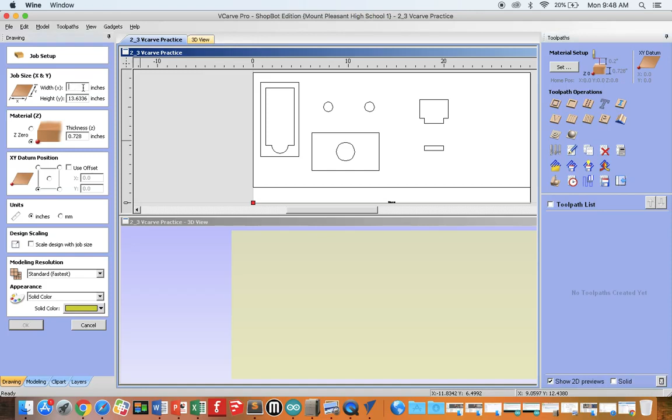Now we need to set up our job size. Your job size for X and Y will be determined by the wood you plan to take to the shopbot. For today's practice, let's assume we measured our material to be 30 inches on the X and 15 on the Y. Make sure that you deleted the old numbers and entered the new ones. For thickness, we would measure the piece of wood with a caliper, and let's assume we measured 0.75. So our material is now set up, X, Y, and Z.

The other job setup features you have to be aware of are Z0, which should always be in this position, and XY datum, which should always be in this position. Your units are inches, and you can click OK.

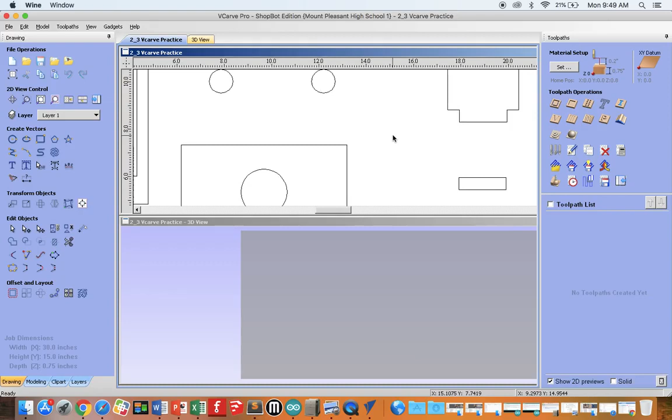Now I'm going to show you some ways to navigate your document. The first thing is knowing how to zoom. With two fingers, slide down to zoom out, and slide up to zoom in. If you ever get lost in your document, click this button, zoom to fit, and it'll relocate your view.

If you ever need to change your job dimensions, click this button and you can go back to this setup. Again, two fingers slide, I'm not clicking, just lightly sliding on the trackpad. Down will zoom out, up will zoom in. If you ever get lost, click zoom to fit and you'll find your document.

Next I want to show you how to join your vectors. When you bring a file in from Onshape, notice I can click on a line, yet this whole rectangle is not selected. If I try to move that rectangle, only that one line moves. That's not what we want. We have to join these vectors.

To do this, draw a box around your entire document. Everything should light up pink. Come down here under Edit Objects and you'll see Join Open Vectors.

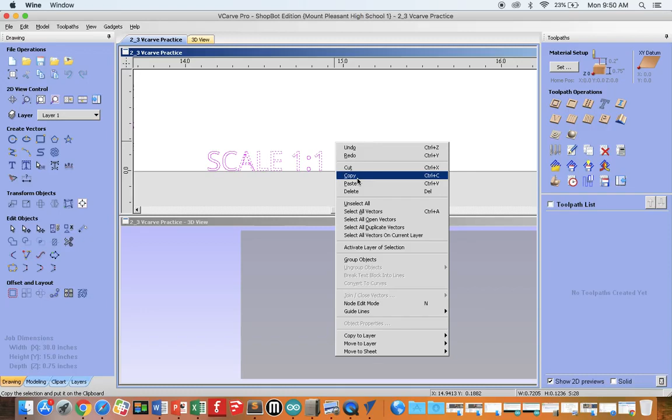I forgot to delete something before doing that. So I'm zooming in on this text. I drew a box around it. Two-finger click, delete. Now we can go in and join our vectors.

I mentioned zooming earlier. You can also do what's called pan. To do that, hold Control down on your keyboard, and with two fingers click and move your fingers around the trackpad while you're clicking. That will allow you to pan.

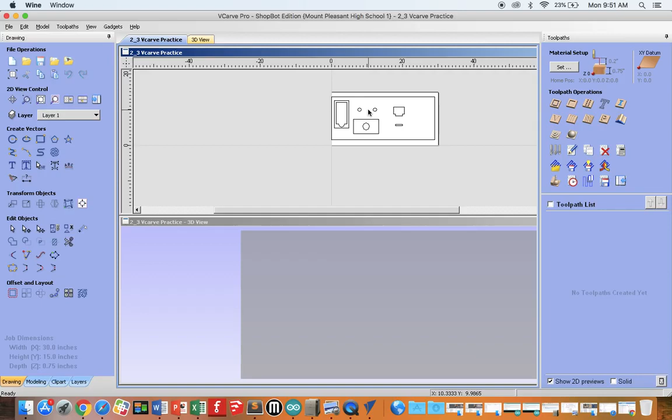Let's try to join our vectors again. Now I'm going to drag a box around all my vectors. Remember, I messed up last time, I had to get rid of that text. Now I can go to Join Vectors,

and you see closed vectors. I only have 3, those would be the circles. They're all considered closed vectors. But I have 30 open vectors. These are all these individual lines here. These are considered open vectors.

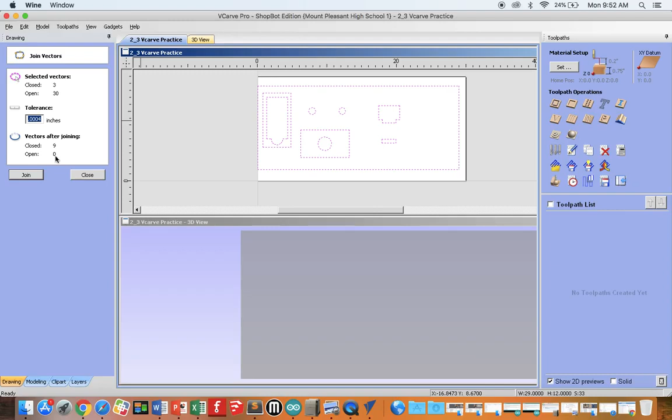In order to go to the shopbot, we can't have any open vectors. And if you look over here, you'll see after we join these, we'll have 9 closed vectors and 0 open vectors, which is what we want. This is a standard tolerance that shows up, just leave it at 0.0004. And when you're ready, click Join.

You can close this join window. And now what you'll notice, when I click on an object, the whole thing lights up instead of just one line.

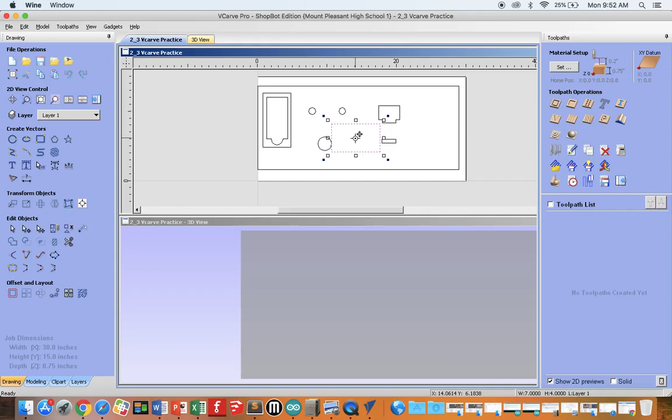I want you to now practice moving pieces around your document. I could click on this and either use the arrow keys to move it over, or use the mouse and drag it around. But be careful, if you wanted that circle and rectangle to be together, you must join both of them, or move both of them at the same time.

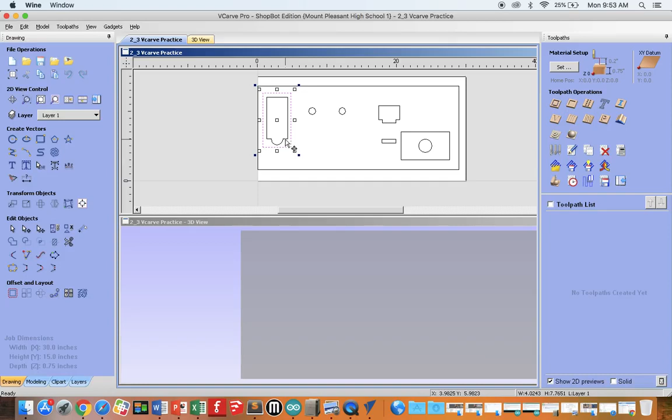In other words, I can drag a box around the two to select them, or click one, hold Shift, click the other, and now I have both selected, and they'll move as one shape. Again, let's show that over here. I could select one, hold Shift, select the other, let go of Shift, and now they'll move together. Or I could drag a box around two things. That's the same thing as doing a Shift select.

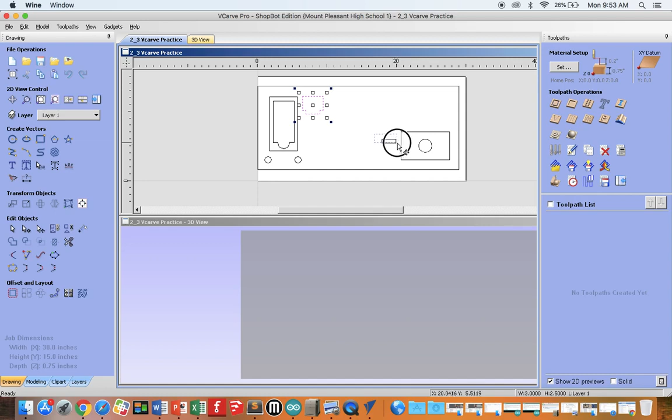So practice moving these around and reorient your shapes. At this point, you're ready for the next video, which is setting up your toolpaths.